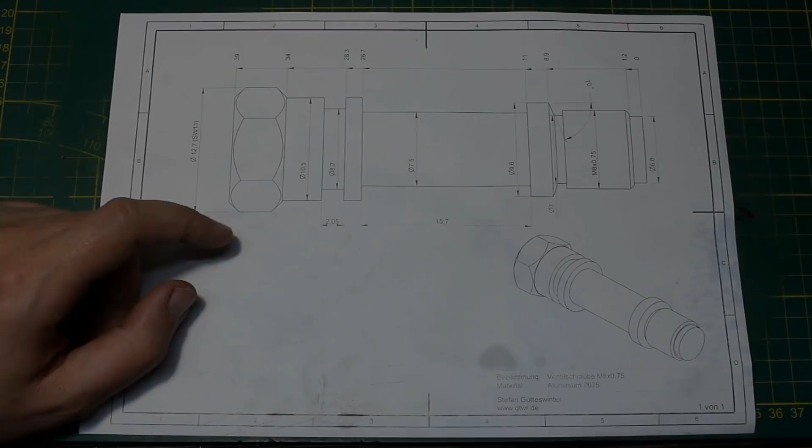Hey, welcome back. I have to turn this vent screw here. It's turned out of aluminium and it has a sealing taper here and an M8 by 0.75 millimeter fine pitch thread here. And to keep it all nice and concentric, I want to single point thread this fine thread.

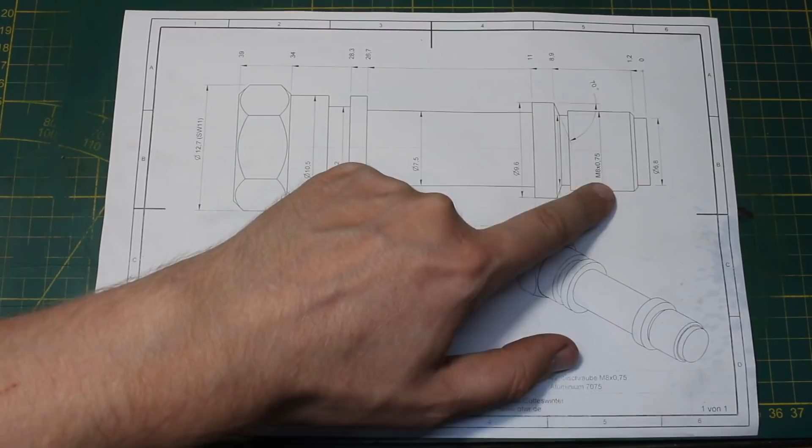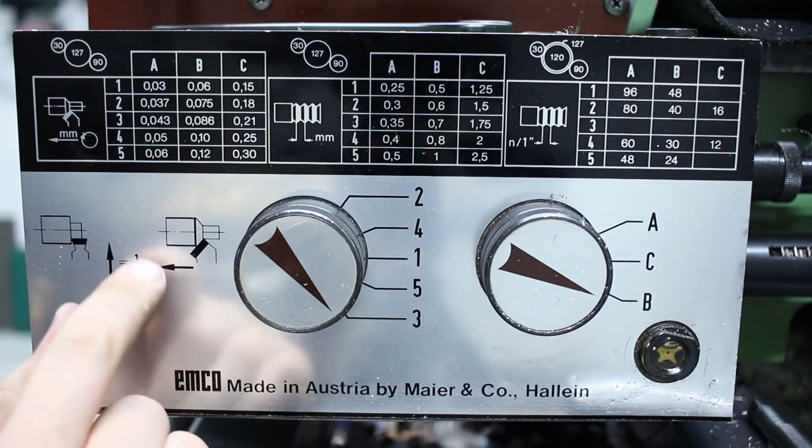So let's go to the lathe and set it for the correct pitch. That's the feed gearbox of the lathe. I have turning feed for lengthwise, and if you take it multiplied by 0.5, it's the facing feed. We have metric and we have imperial threads per inch. We were interested in metric, of course.

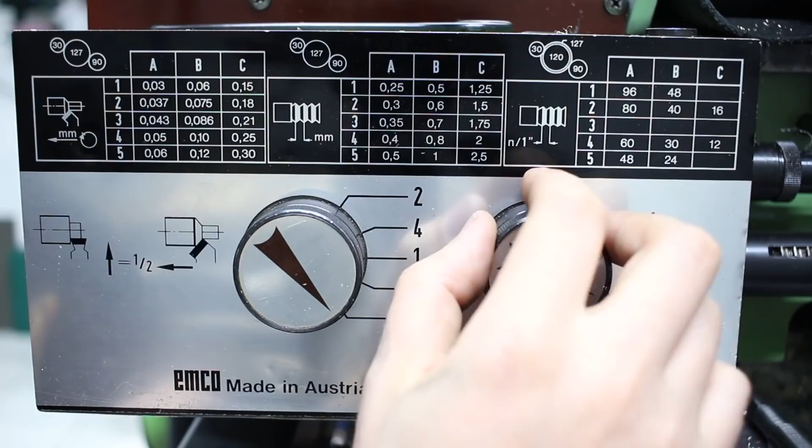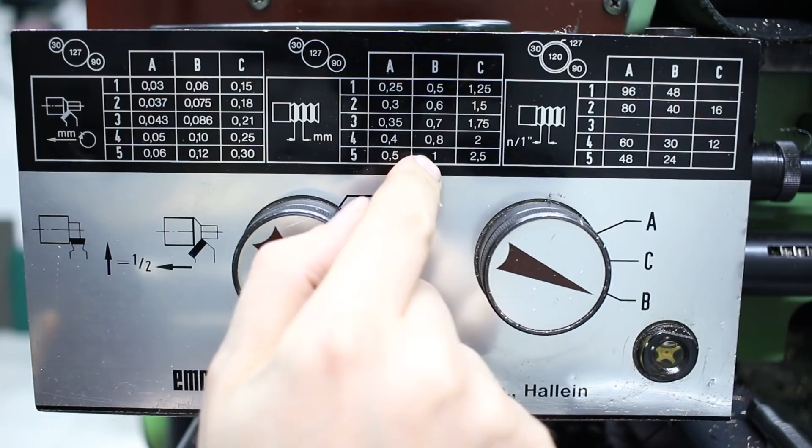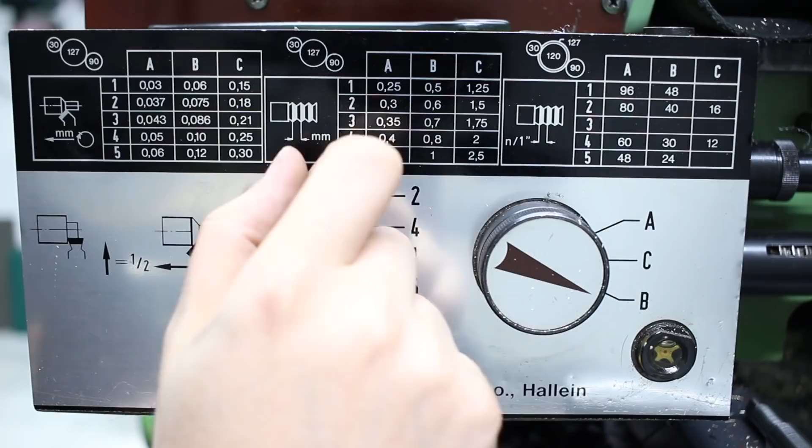Let's see, we have 0.35, 0.4, 0.5, 0.6, 0.7, 0.8. Dang it, there is no 0.75 millimeter pitch on this machine that we can turn, which is quite annoying. I've seen it on a lot of machines that one pitch is always missing. So let's see what we can do.

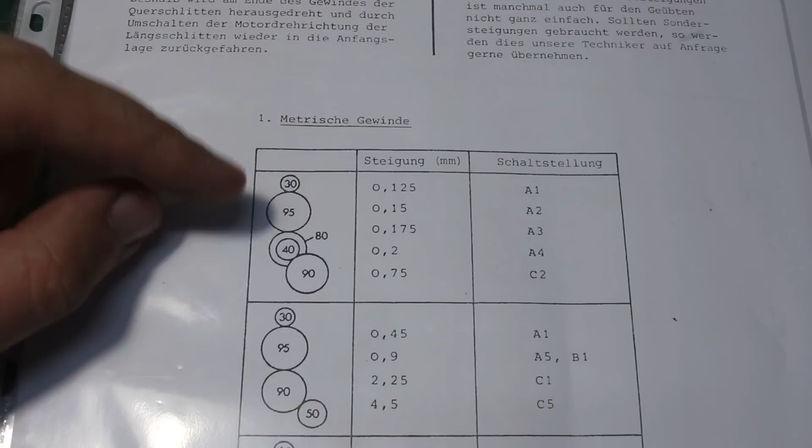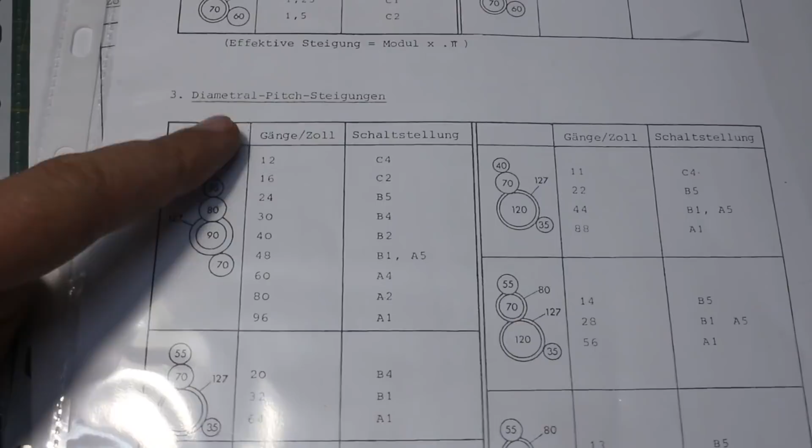Okay, that's the chart for threading odd numbered threads. Metric module for metric worms, diametral pitch for imperial worms, and additional imperial threads. Today we want to cut a metric fine thread.

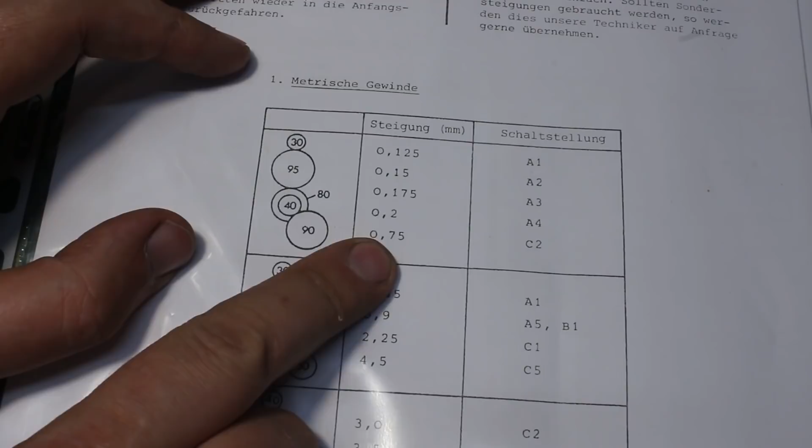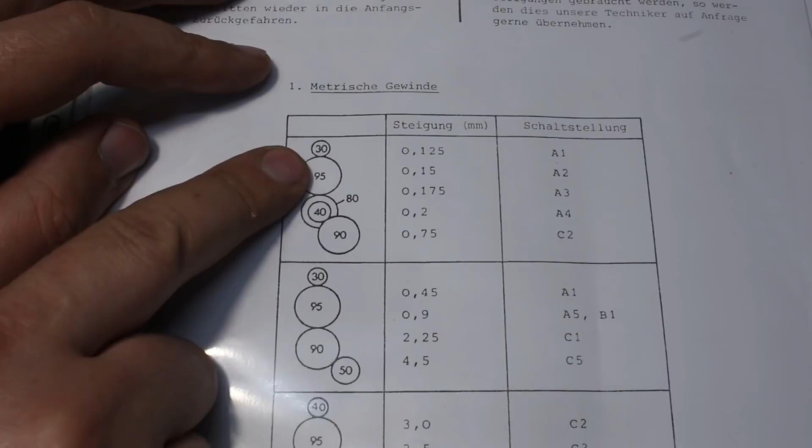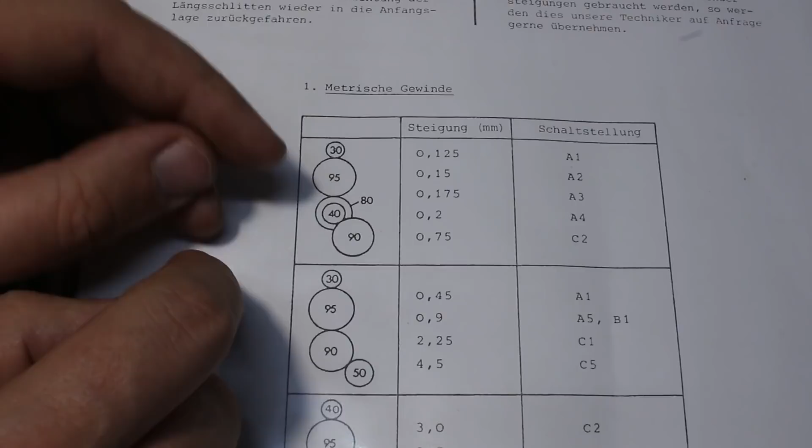There it is, 0.75. We need to add an additional set of gears, 40 and 80 as a combination gear, and we need a 95 tooth gear in addition. So we need 95, 80 and 40. I do not have those. I have the 90, I have the 30, and I have a 127 and a 120 for metric imperial conversion. So, dang it. Seems like we have to make a bunch of gears.

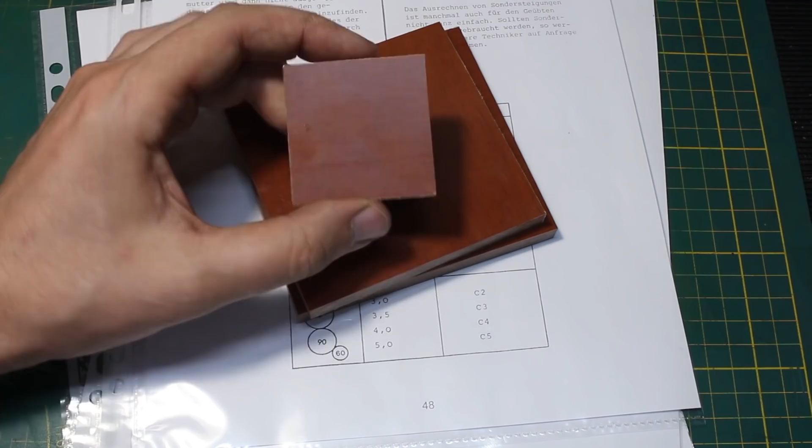This is phenolic, linen reinforced phenolic. It's an interesting material. You can get it in sheet form and you can get it in round material. If you get the sheet material, it's layer after layer of linen put on top of each other, and it creates a very robust, very solid plate, which is very strong in the XY direction if you look top down on it, but in the Z direction it's less robust because it can delaminate.

If you get the round stock, which I do not have here, it's wound up. It's like taking a piece of cloth and rolling it up like this to create something that almost looks like a tree trunk. Gears are made out of plate material. If you use the round material, the rolled material, the layers are right at the teeth.

Let's do a quick sketch. If you have your rolled material, it has almost like a grain that goes like this. And now imagine that you put in gear teeth like this. Then you have these layers going through the teeth. That means the teeth will break at the layer intersection.

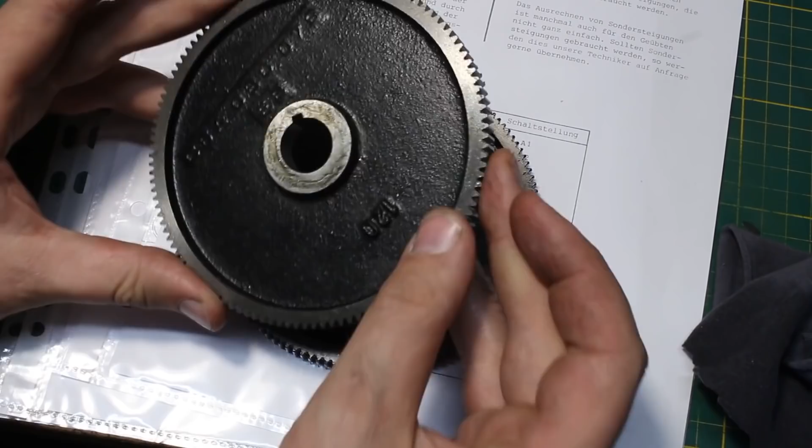These are two of the Emco change gears. These are made out of cast iron, hence the cast look here. And the phenolic I have is the same thickness. This is 10 millimeter phenolic, and these change gears are also 10 millimeters.

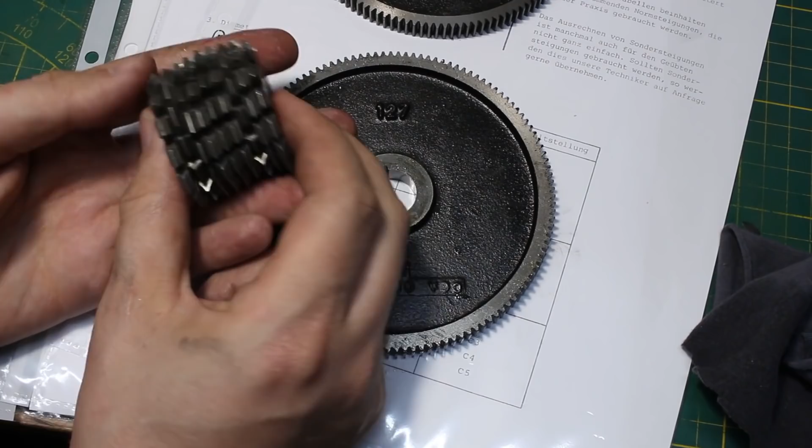I have a full set of Module 1 gear cutters. You need a full set because depending on the number of teeth of a gear, the shape of the teeth changes a little bit. And with a full set, you can span everything from something like 12 teeth at a minimum up to an infinite number of teeth, which would be a rack, a linear gear. And these are Module 1 because the gear cutter here fits.

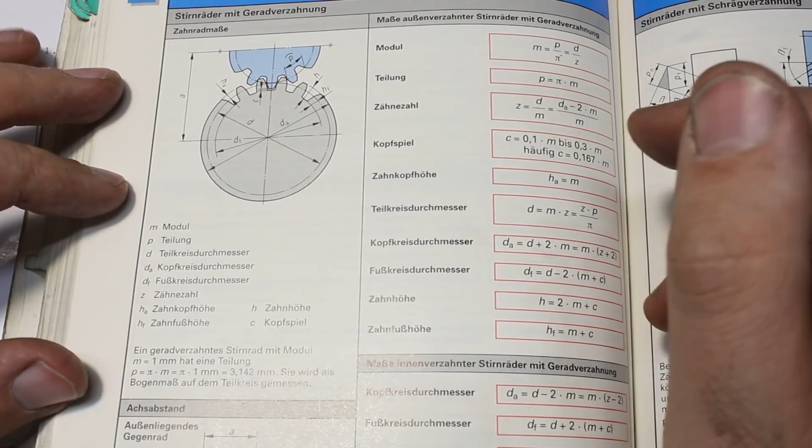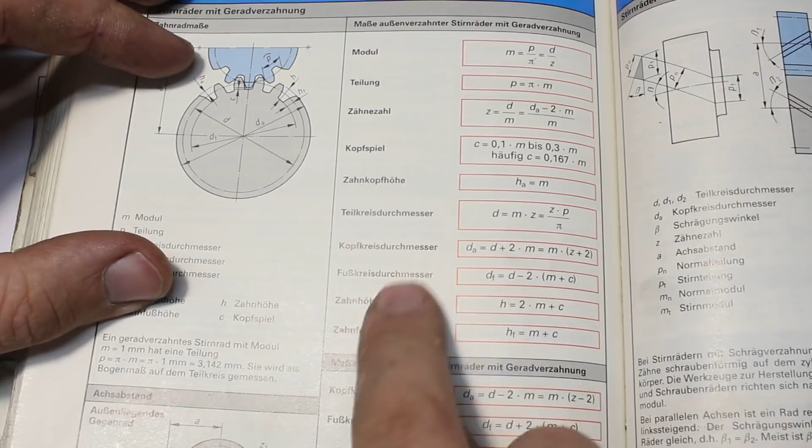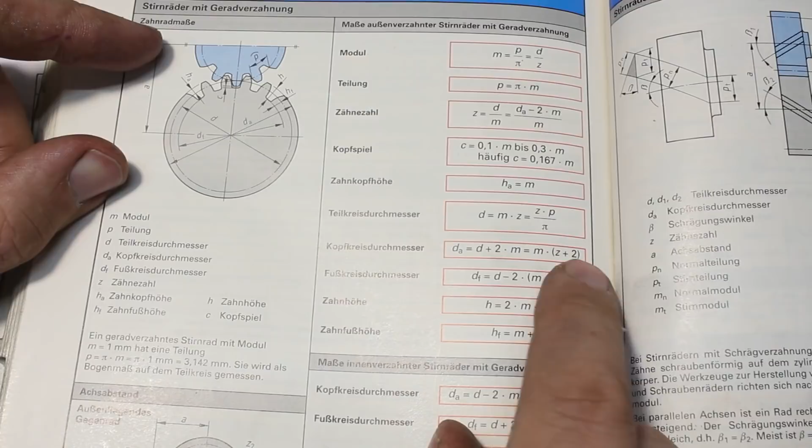So now we figure out how to cut these gears. Okay, here we find everything for a standard spur gear that we need. First and foremost, our interest is dA, which is the most outer diameter, because we need to turn these blanks down to the diameter so we can cut the teeth. And where is it? dA is module, which in our case is 1, multiplied by number of teeth, plus 2. In our case, we have 40.

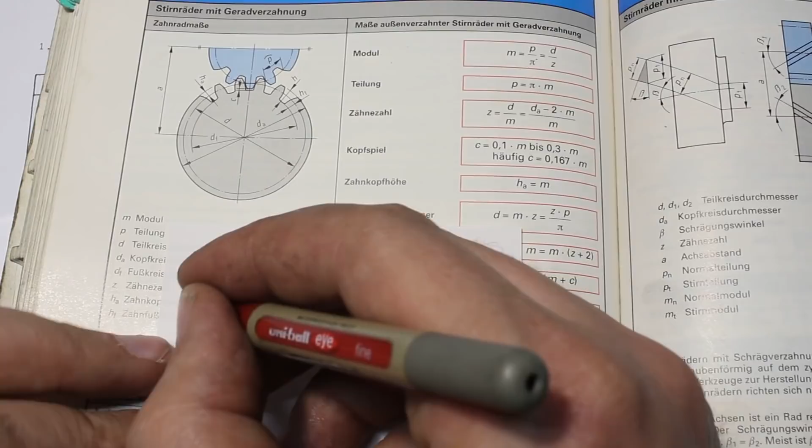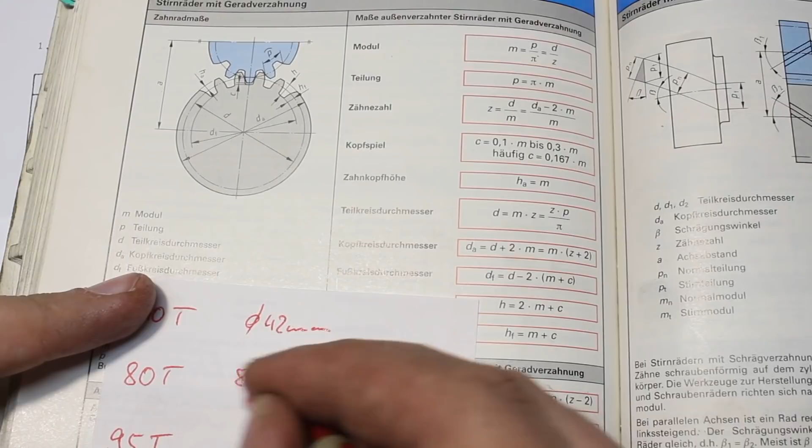Oh sorry, we're English here. 40 teeth, 80 teeth, and 95 teeth. Module 1, so we can ignore this here. So we just have to take number of teeth plus 2. So this is 42 millimeter diameter. This is 82 millimeter diameter, and this is 97 millimeter in diameter. These are the diameters we're going to prepare, and we need a 19 millimeter bore in them, along with a 4 millimeter keyway.

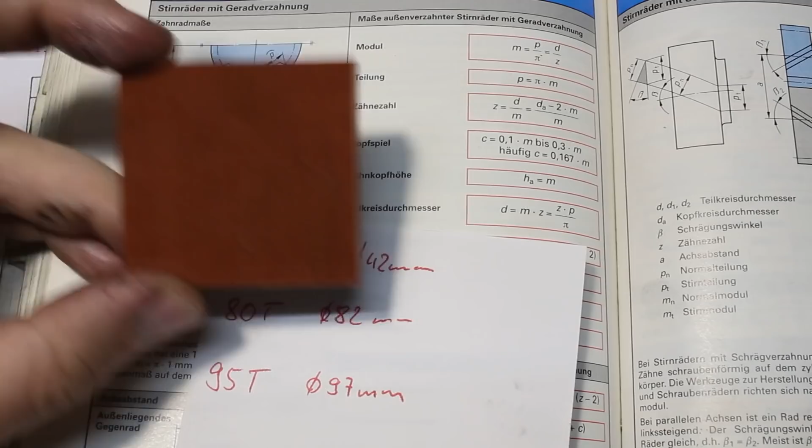I've never tried key slotting the phenolic. I will probably do a fake keyway. After we drill the 19 millimeter through hole, I will mill a keyway in here with a 4 millimeter end mill.

I suspect that when we try to broach this or slot it with a slotting cutter, we will get a lot of blowout down the backside, and we don't want that.

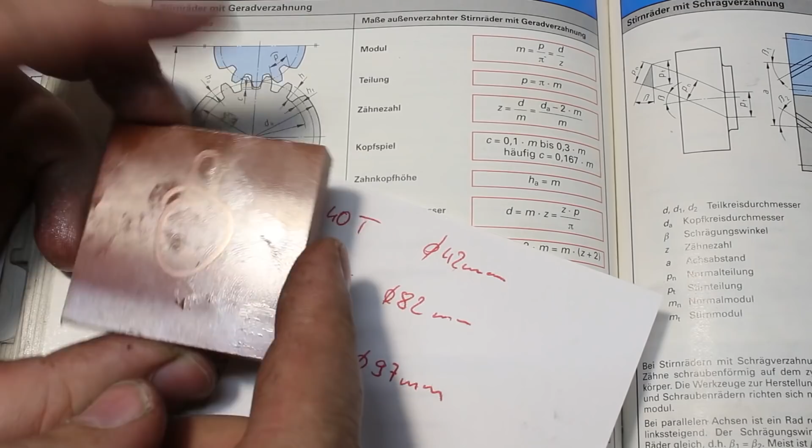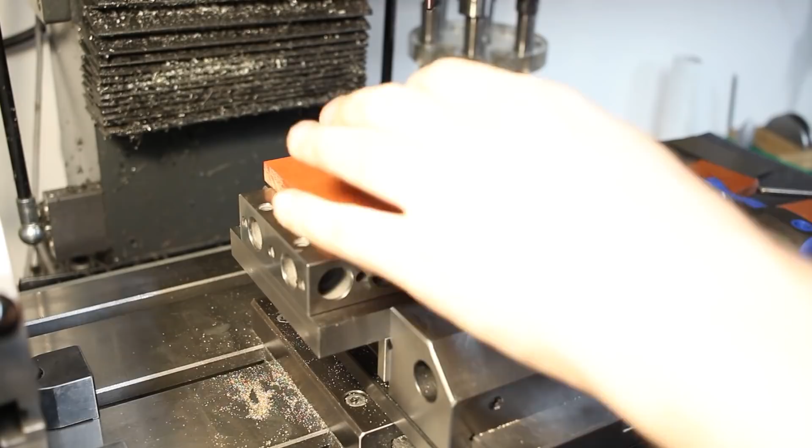Okay, we're over at the milling machine, and I have a large parallel here, two 1-2-3 blocks. I will drop my part on top of it and use two of these cantilevered clamps, which a lot of people ask where I get these from.

These are sold through Hoffmann Group and are super high quality, very nicely made with a trapezoidal screw instead of a normal screw thread that's 60 degrees.

I just marked the rough center here with a felt marker, and I'm aligning my drill here. I take the drill out and replace it with a 19 millimeter rotor broach, core drill, or annular cutter, or whatever.

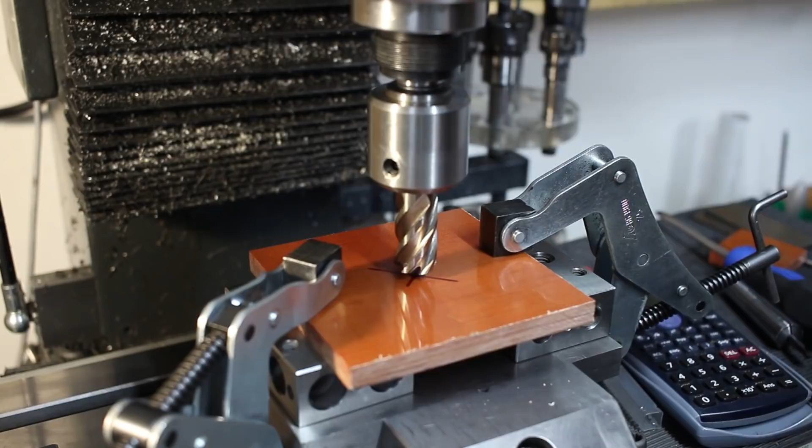In most plastics you have to be a little bit careful with these drills because they tend to grab, so we will use the fine feed of the quill, not the quill handle. Running relatively slow so we do not stir up a ton of dust, and I'm going to use a shop vac.

There we go. Usually the slug falls out without an ejector pin, but the phenolic is a little bit weird in that regard and does not want to fall out because it tends to get a little bit compressed during the cut, and after the cut it expands and jams itself in.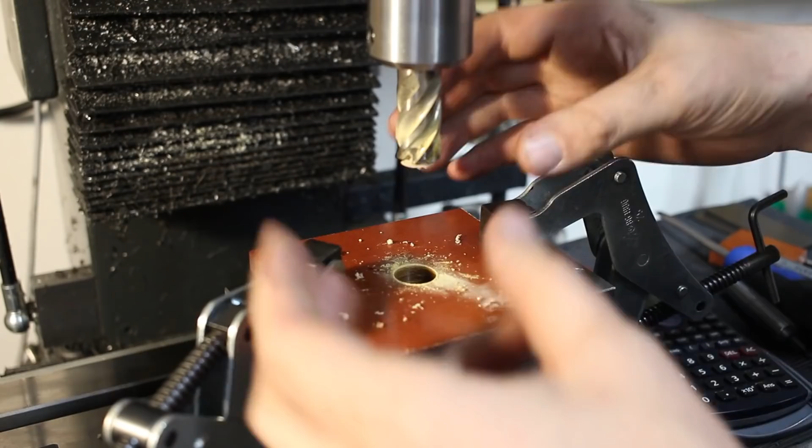Could be worse. Punk. And back in. There we go.

Now we switch to a boring head and bore it to 19 millimeters, using a CCMT boring bar with a razor sharp polished insert for aluminium. Okay, there we go.

18 millimeters. Now we can adjust our cut, 10, let's go to 50, measure, and then take a final cut. Should be possible to cut this in 1 or 2 passes to final dimension. Cutting pressure in phenolic is not crazy high with a free cutting tool like this.

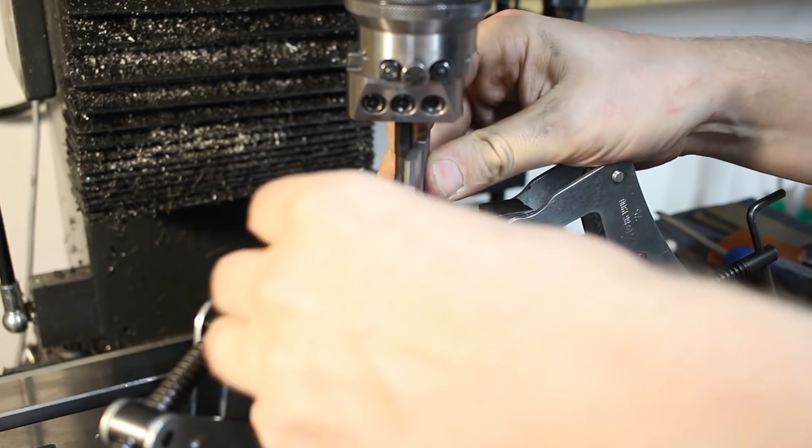Running at 580 RPM. In this case I'm able to sneak the 2-point internal mic around the boring bar so it clears, which is very convenient. Otherwise I would use telescoping gauges.

In this case the 2-point ID mic is okay. This is 18.35 millimeters, so we adjust by 0.5, 0.1, and then 0.5 and 0.2. This should give us 19.02 millimeters diameter, hopefully.

I switched to 1000 RPM just to have it cut a little bit freer. That was easy. 19.02, just the dimension I set it to.

I really like the Wohlhaupter boring head. We will not disturb the setting because when I do the next two, I will not have to do any adjustment. I will just put the boring head in, take my cut, and it's done. Should be on final dimension.

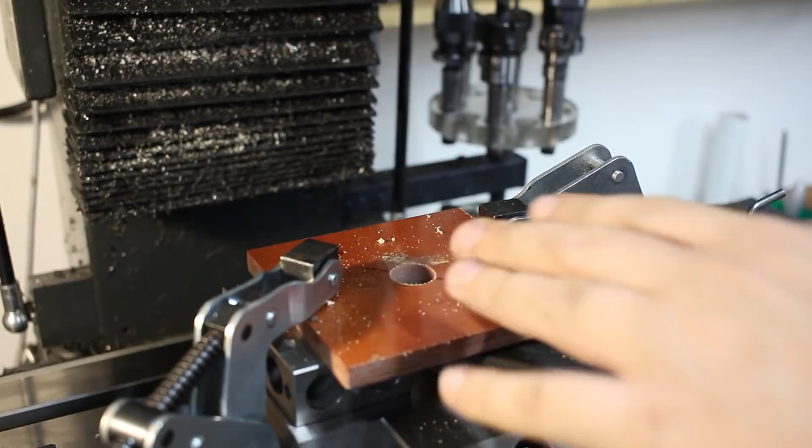Boring bar deflection in this material at this RPM and this depth of cut should be small enough not to be a problem. Now we need a 4mm carbide endmill and we will cut the keyway right away.

There is a 4mm keyway, quick and dirty.

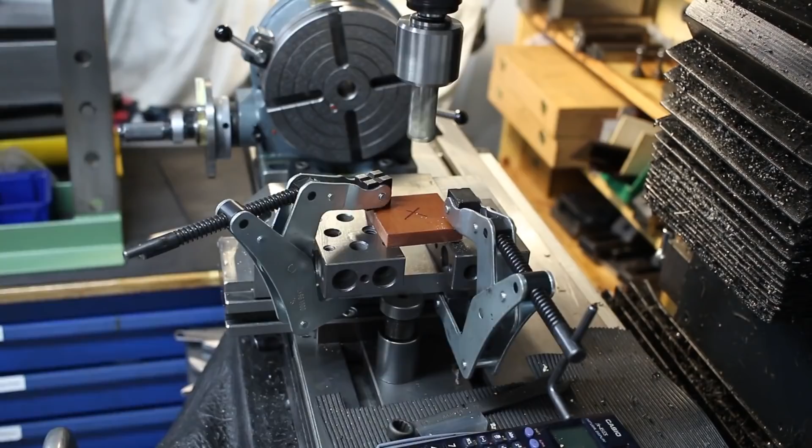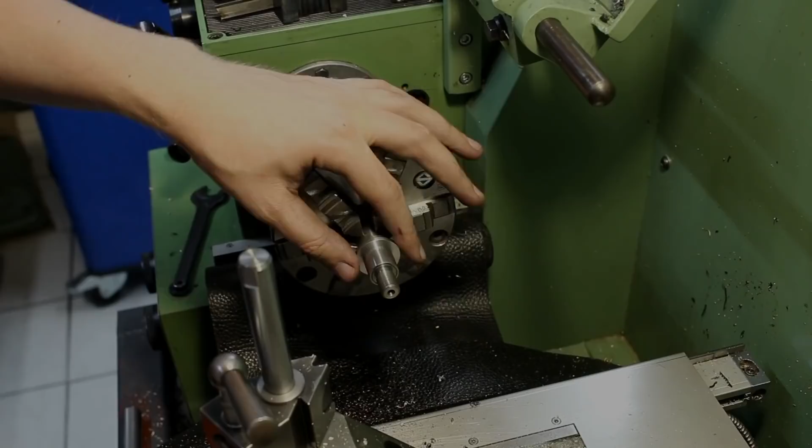Okay, over at the lathe, and I have a straight shanked arbor. This has a 20mm shank and a 16mm diameter here, and a fine thread here for a nut to clamp whatever you put on here securely in place.

And to accommodate for different diameters, I make these bushings out of whatever I have at hand. This is 16mm ID and 19 OD. This slips right over here, and then you indicate it in.

Use the set-true feature of the 6-jaw to get it on center, or you have a 4-jaw independent chuck, and you can use that to true it up, but I prefer the 6-jaw for most work. And then the work slips right over.

Now I just need a spacer ring to fill up this gap here. This 22mm ring of a mill arbor will do.

Of course, this has a little bit of side play, so I'm just rough aligning it so it kind of runs true-ish. Same for the washer. Just so it doesn't introduce a whole lot of imbalance. We're not running this at warp 9 anyway, so it should be fine.

Turning tool wise, I'm going to use again an aluminium insert. When I say aluminium insert, it's of course a carbide insert, just the geometry for aluminium.

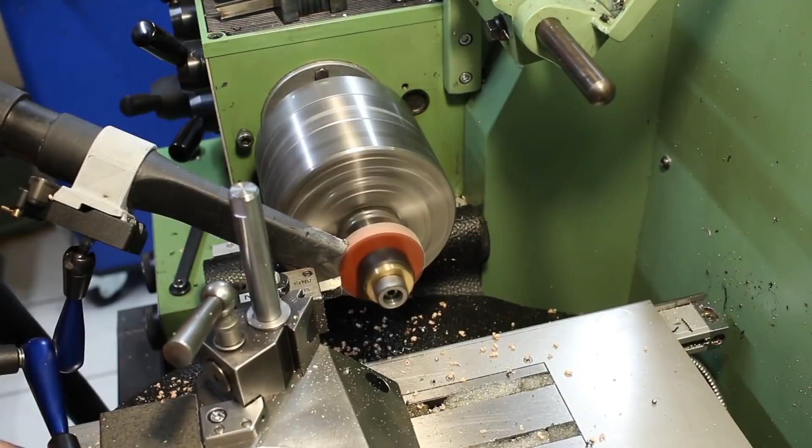As you can see, the larger chips still flow by. I'm not worried about these. I'm worried about the fine dust that settles in your lungs and on every surface in the shop.

It's 20 microns oversize. Should be okay. Should be definitely okay, because on the change gears you set the gear mesh manually anyway.

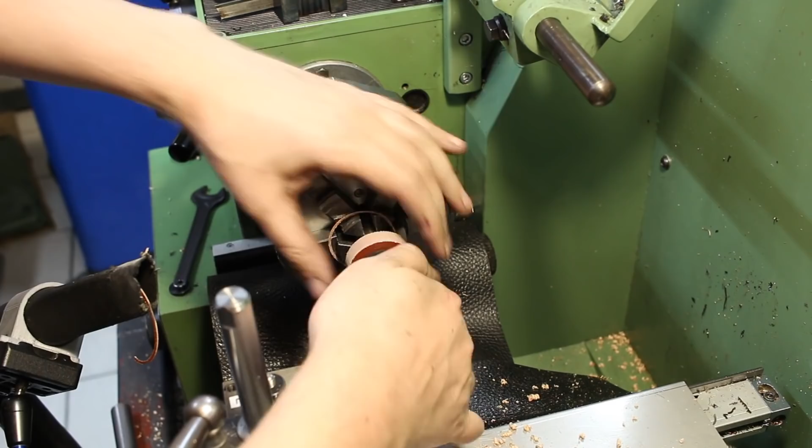So that one comes off. Spacer rings come off, and our gear blank comes off too. There we go, first one.

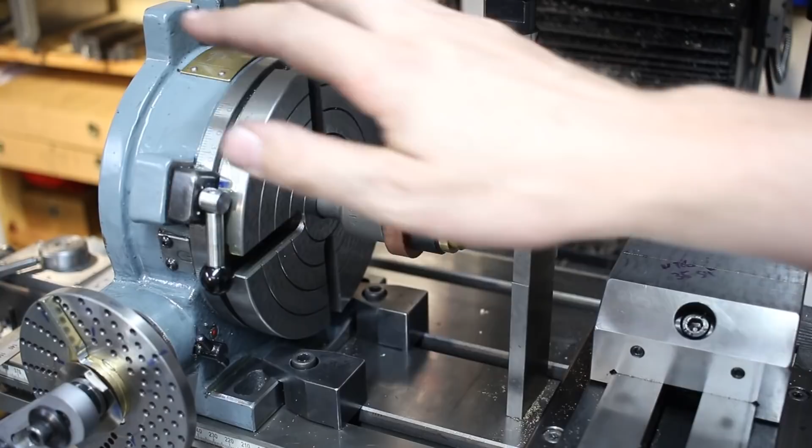We're over at the milling machine. I have my rotary table with indexing plates, and a 16mm standard mill arbor here in the Morse taper 2 socket. I'm using the same 16-20mm bushing that I used before on my lathe arbor, here on this mill arbor, and I put the phenolic blank over it.

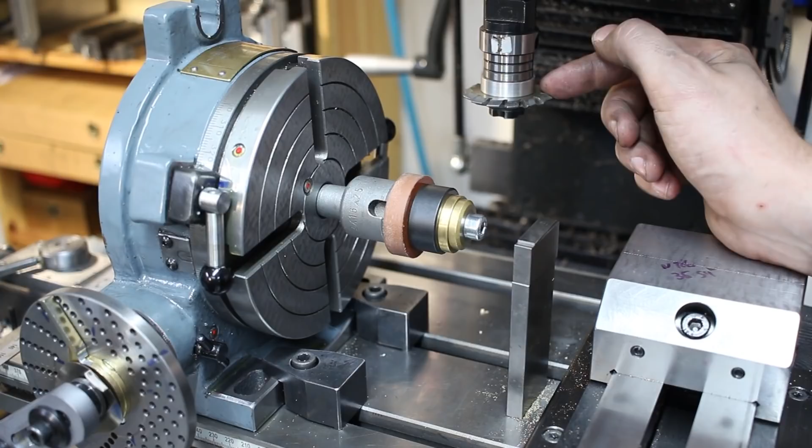I already selected the correct gear cutter. This is a number 6, module 1. Number 6 because, going by a chart, it's suitable for 35 to 54 teeth, and this is a 40 teeth gear, so we're right in it.

I have a gauge block stack. This represents the center height of my rotary table - that's a dimension I just know. This cutter is 4mm wide, so putting the cutter on center will be fairly simple. I'll drop this on here until I make contact, zero out my quill DRO, remove the gauge block stack, drop down an additional 2mm, and lock my quill. That's my position - the cutter at center height, on the axis of rotation of my rotary table.

Next we have to touch off on the diameter. There we go, touched off, Y direction zero.

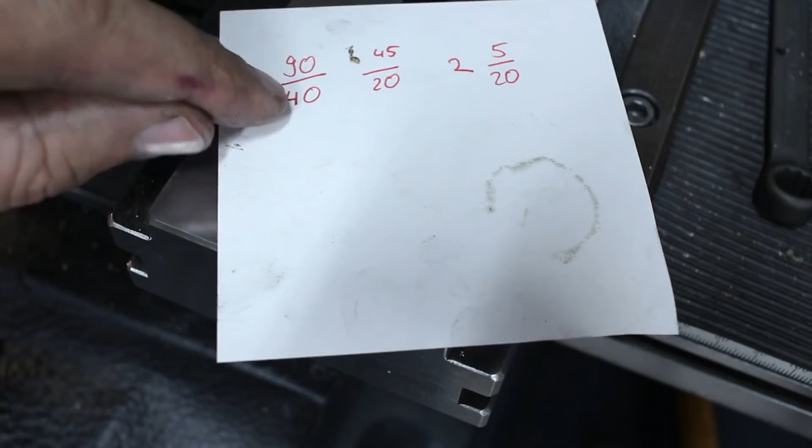This is the calculation for the indexing plate. The rotary table is 90:1 and I want 40 teeth. So we try to reduce the lower number to a number I have an indexing plate for - in my case, 20. So 40 divided by 2 is 20. Then we divide 90 by 2, and we end up with 45. We have to go 45 holes on a 20-hole indexing plate for each tooth. That works out to 2 full revolutions plus 5 holes.

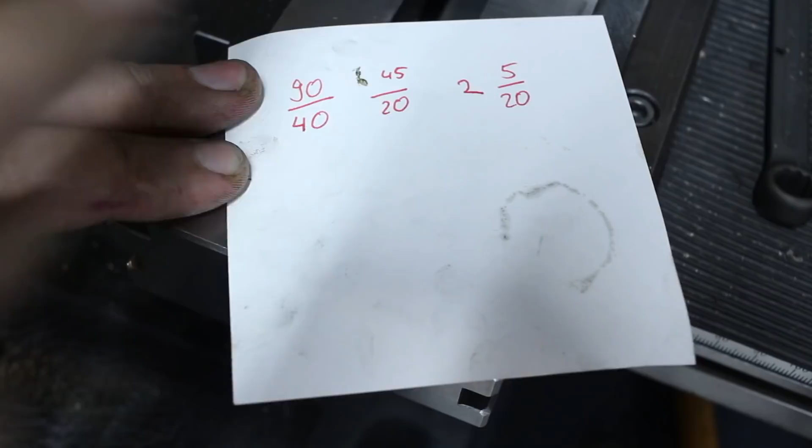I did a test cut with 3 teeth now, and you can already see the fine dust produced by this material, so we're definitely going to use dust extraction for this too. I'm too young to ruin my lungs, and even if you're old, you're too old to ruin your lungs.

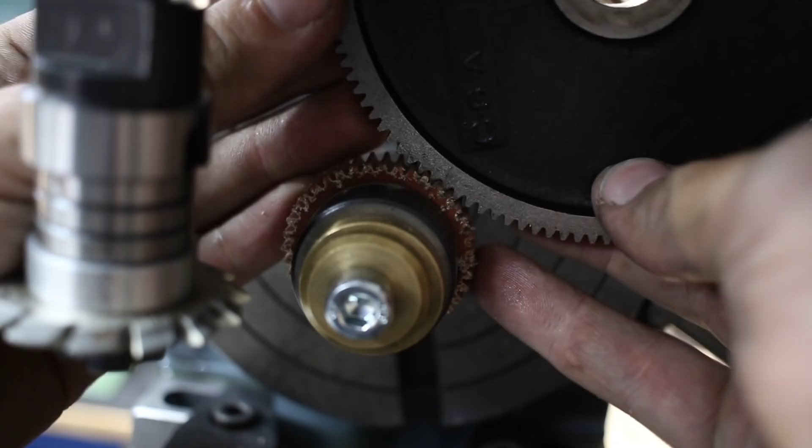Here's the gear. This is the original 120 teeth gear of my lathe, and this feels good. I'm not worried.

So I'll pull this off, and you can see the actual stack up of these parts. A little bit longer screw would be nice - that was a little bit small engagement length. Now we can pull off the gear.

And here again, this is a 16mm arbor, and this is the 16-20mm bushing I was talking about. Looks like a gear to me.

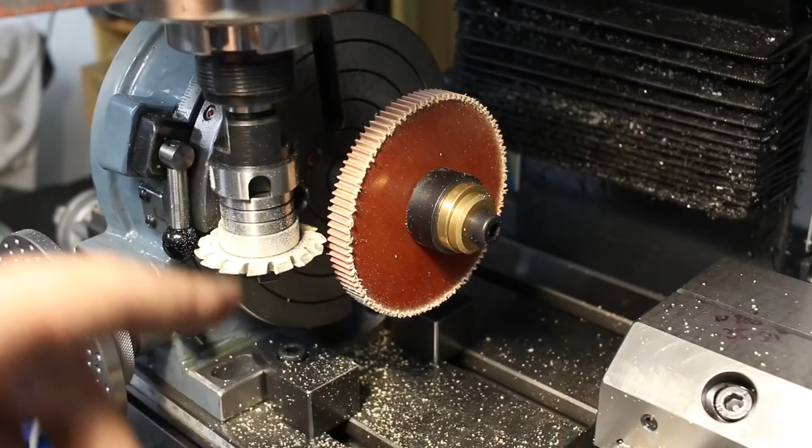Got all 3 gears cut. This is the 95 tooth one, and as you saw, it also came out with no half tooth extra - good sign. Let's take it off and deburr it.

Found a good way to deburr them relatively quickly. A small steel wire brush works very well for deburring. I'm using it in the flex shaft handpiece because this has a lot of low speed torque compared to my small electric die grinder.

Just turning it around like this and keeping it in contact.

The remaining work will be done with a small diamond point in the pneumatic die grinder, and I'll just follow the contour of the gear with it. That will put a nice small chamfer on each of the teeth.

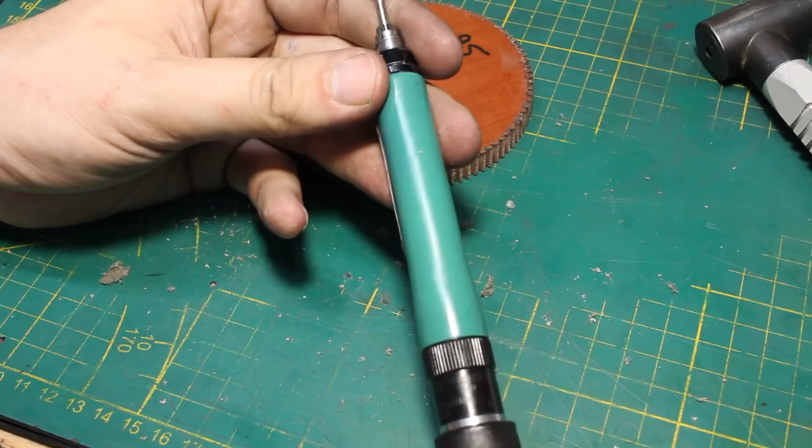In the last video somebody asked what this die grinder is - this is a BX pneumatic die grinder, 60,000 RPM. Really a nice tool, but it takes a ton of air.

I'm using a teardrop shape, and when I put this in a gap between 2 of the teeth, it starts out here on the larger diameter of the teardrop shape, and when I pull it towards me, it automatically moves down the sides of the teeth and puts a nice chamfer on it until it hits the bottom of the teeth, then I can fully get out, and it even puts a small radius on here. So that's a very fast way to deburr these wheels and put a nice chamfer on them.

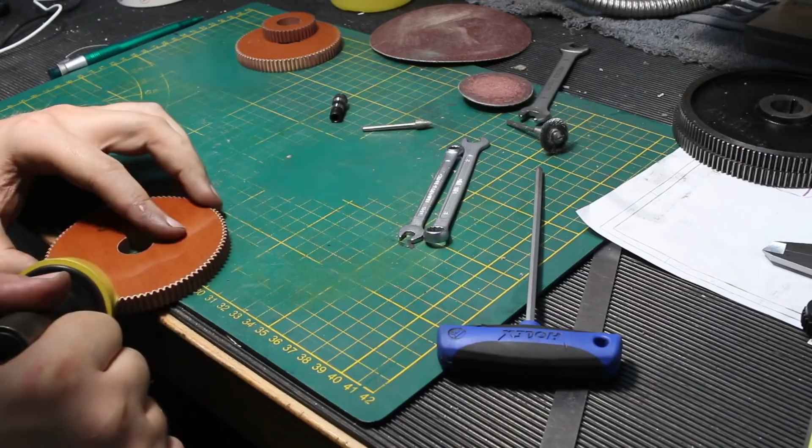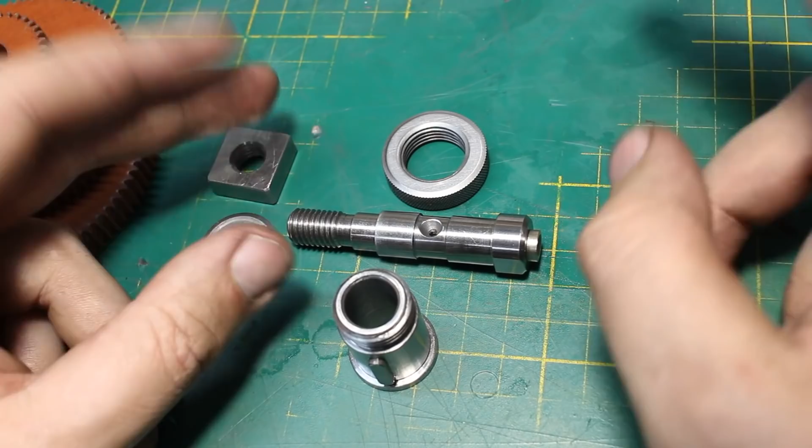Little jump forward in time. I made a few parts offline because I want to get them done, and filming takes about 3 times as long for everything. So I needed another axle and sleeve for the change gears, because when you do non-standard threads on the Emco, you need an additional gear.

So I duplicated the original one. Everything here is 42CrMo4, pre-hardened, heat-treated steel, which makes it very durable.

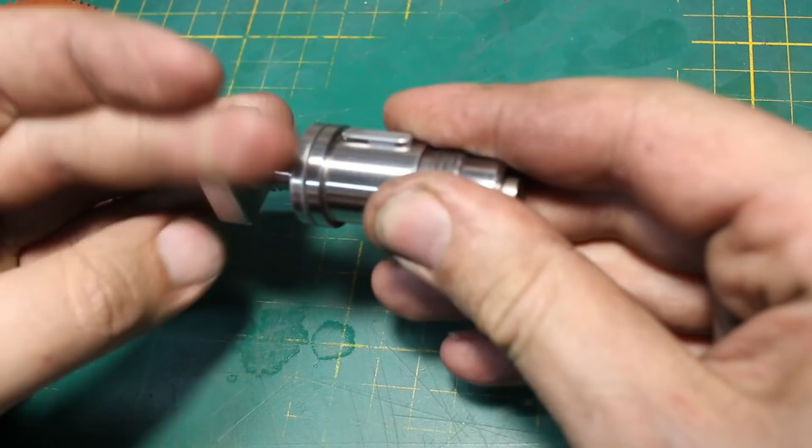Everything's just turned. Shaft with lubrication, one grease fitting here. This goes on here, then you have this washer and the nut. With the square nut, it bolts to the banjo - the change gear banjo.

Then you put your change gears on, 2 at a time. They're of course keyed onto the shaft.

And then you take your finely knurled fine thread nut here and secure the gears to the sleeve. Once you tighten this down, the sleeve is still free to rotate. It has about 0.1 millimeter of end play, so it spins freely on the axle and does not bind up and create a very entertaining situation.

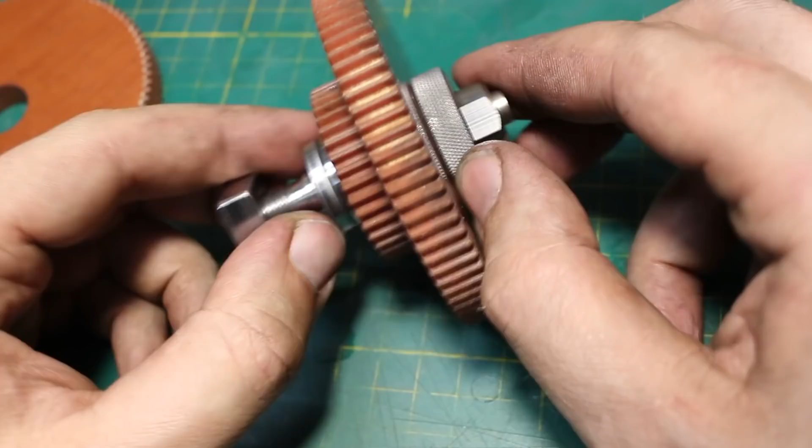So this is the new change gear bolt with the phenolic change gear, so let's mount it on the lathe. I think we can do this whole setup with one 13 millimeter wrench. First we disengage the change gear banjo by opening this one nut down here. Then we take off the change gears from this one bolt here.

Move this one out of the way. And we take our second change gear bolt and mount it to this lower slot here. Get the square nut behind it and thread this together, just like this. And we move it all the way out so we have room to work.

Now we need a 40 teeth gear. This will make contact with this 90 teeth here. Get our gear meshing nice and... there we go. A lot of people use a strip of paper between the teeth to get the gear mesh right, but usually this is fine. Yeah, these phenolic gears will get a nice covering in grease after a few rotations.

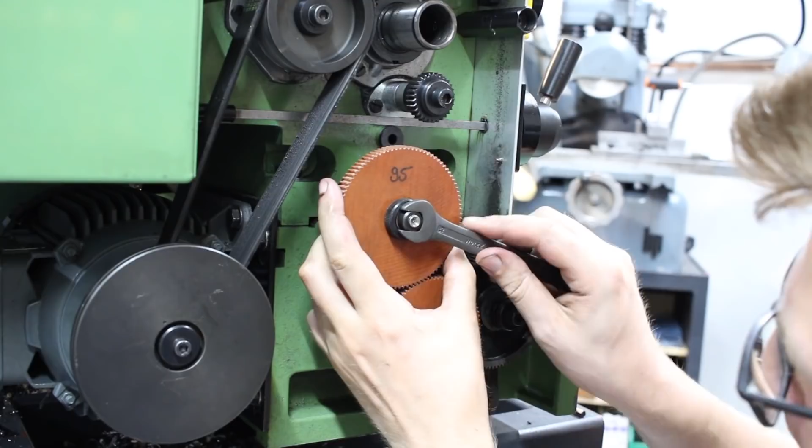There we go, that meshes nicely. Now we can bring these in contact. There we go. Now we spin it by hand. Okay, that's looking promising. Let's give both of these posts a little bit of lubrication. Let's have it run.

Sounds like change gears, not too bad. Looking good, I'm really pleased. Yes, I put a lot of extra work into these gears and the axle and stuff like that, just for a single part. But sooner or later I will need this additional change gear shaft and the gears anyway, so now is as good a time as ever to make it.

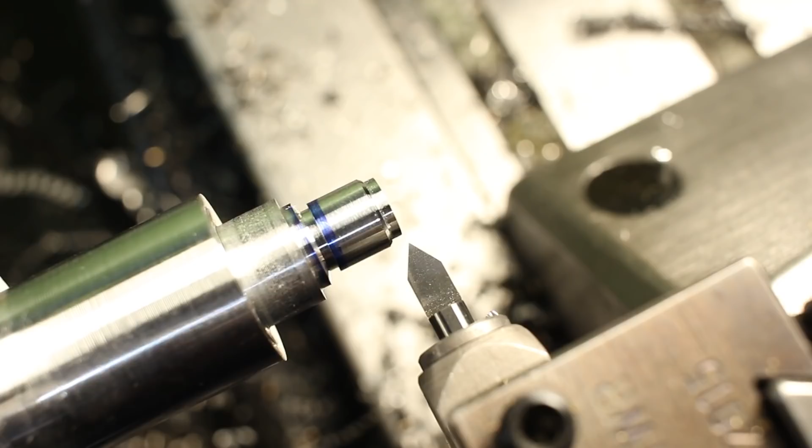Now, finally, after cutting the gears and making the axle, I can cut the thread. I prepared the diameter of 8 millimeters. Unfortunately, I do not have a thread gauge, so I'm using an M8 by 0.75 millimeter fine thread nut. I already set the lathe for 0.75 millimeter pitch.

Okay, I took a first skim pass and I'm checking with a 0.75 millimeter fine thread nut, and looks good to me. Let's continue. Get some cutting oil on there.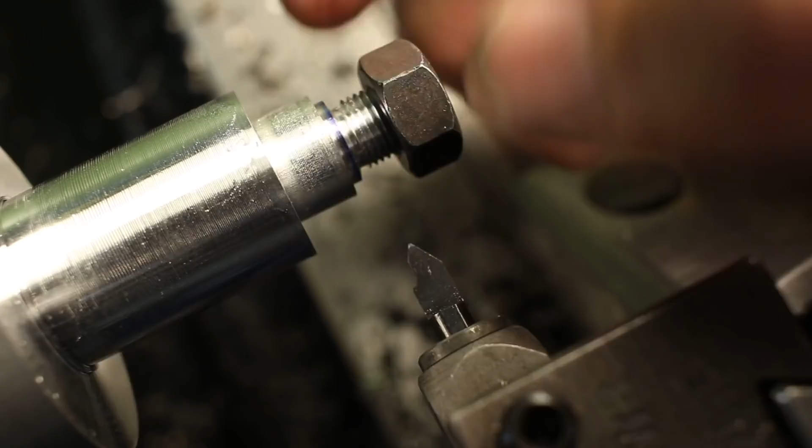There we go, it's a little bit tight, so I'll take a spring pass. I'm very pleased. That's a nice 0.75 millimeter thread.

So now, after finishing the thread here, I can continue turning the OD. This OD here finished. I left this a little bit fat because if I had already turned it down to 10 millimeters, the cutting pressure of threading the part would possibly have caused a lot of deflection.

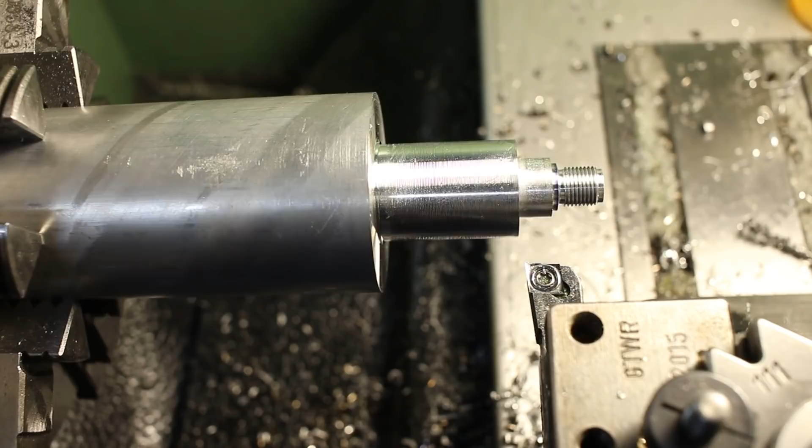Okay, I think that's it for this project. The making of the change gears and adapting them to the machine was probably the most interesting part. The rest of this is plain turning. So let's bring this to an end. Thank you all for watching and see you next time.